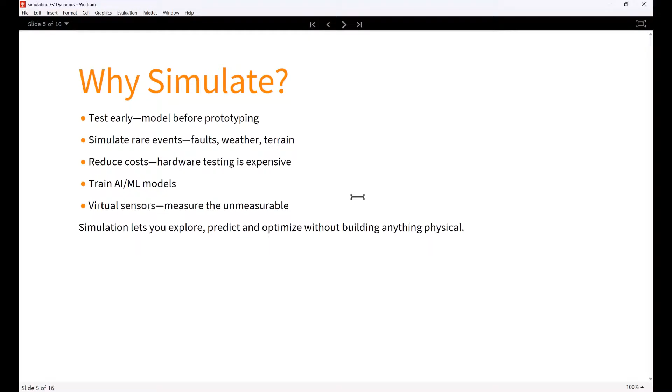With that in mind, let's jump into our EV model and look at the simulation results. Let's open up the model in System Modeler.

For those of you who are new to it, this is the System Modeler's modeling interface. You can build models visually using drag and drop from the built-in Modelica library. This library includes hundreds of components from domains like electrical, mechanical, and thermal systems. Throughout this presentation, we will look at several of these components more closely and see how they connect to simulate electric vehicle behavior.

Here you can see the top level EV model. The EV is connected to a velocity profile representing how the vehicle moves, and to an ambient component with a temperature input. These components are hierarchically structured, meaning each block contains subcomponents, which you can explore by double-clicking.

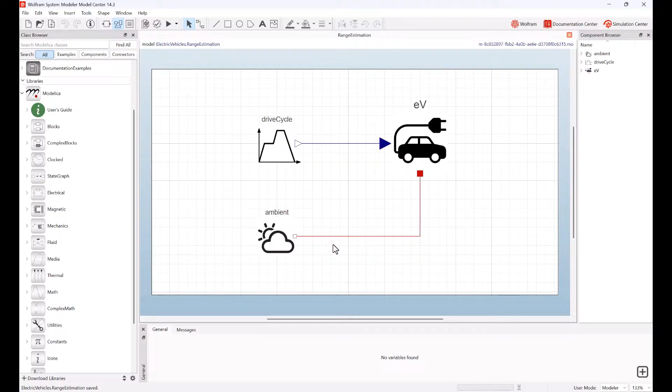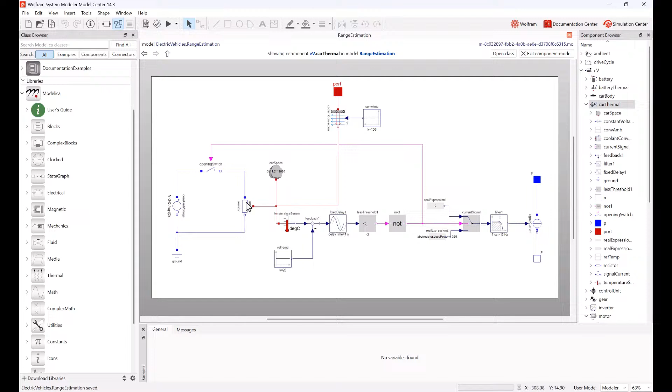Let's zoom in one of the EV block. Inside, we see a detailed view of the EV architecture: motor, gearbox, controller, inverter, battery, and thermal systems. You can continue drilling down into any component and even switch to text view to inspect or modify the underlying equations.

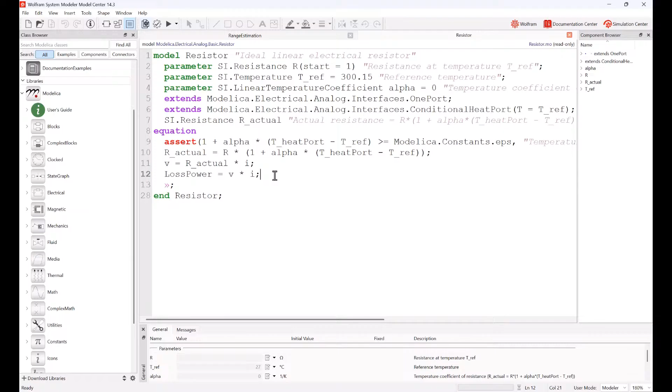For example, in a resistor block, you will see Ohm's law implemented explicitly with voltage and current relationships. You are not limited to built-in components either. You can define your own custom models from first principles or experimental data.

Let's return to the top level and now explore each of the major components one by one. Let's now walk through the major components of the EV model. We start with a battery, which acts as the energy source.

In our case, it provides a DC voltage of around 350 volts. That DC voltage needs to be converted into AC before it can power the AC motor. This is done by the inverter, which sits between the battery and the motor.

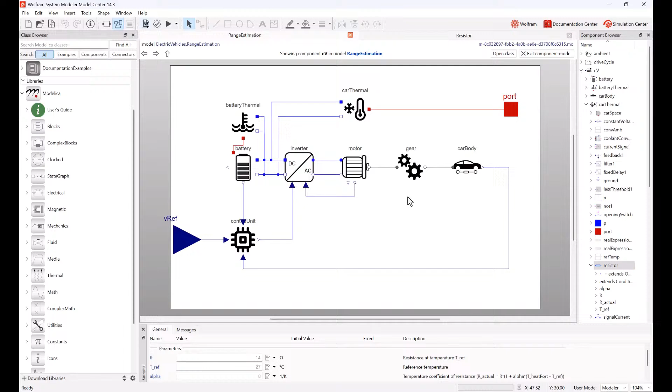The motor produces torque, but at a very high rotational speed, often around 20,000 rpm. To match the wheel speed, this needs to be reduced, typically down to about 2000 rpm, and this is done using a fixed gear reduction stage.

From there, power flows into the car body model. This component accounts for all the external forces acting on the vehicle, including aerodynamic drag, rolling resistance, gradient forces.

There is also a control unit which monitors vehicle speed and regulates current supplied to the motor to achieve the desired driving profile.

Finally, we include thermal components, one for the battery and one for the car, to simulate how heat builds up or is dissipated during operation. Of course, in a full vehicle model, there are many other components such as DC-DC converters, auxiliary batteries, and accessory systems. But for this presentation, we will focus on the core powertrain and thermal systems.

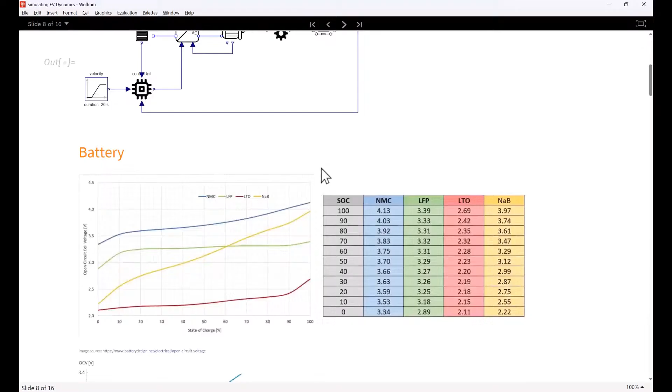Let's take a closer look at the battery component, which plays a central role in EV performance. There are different types of battery chemistries used today, such as LFP, NMC, and LTO. Each chemistry has its own characteristics, and one of the most important is the open circuit voltage versus state of charge, or SOC, curve. In the chart shown here, you can see how the voltage changes as the battery discharges.

NMC cells deliver the highest voltage, around 4 volts at full charge. LTO cells deliver lower voltage, around 2.5 volts. LFP, though not the highest in voltage, has a nearly flat OCV curve, which means the open circuit voltage stays stable across a wide SOC range. This ability is one reason why LFP has become widely adopted in many EV platforms.

Now, this data is for a single cell. In a real battery pack, however, cells are arranged in series and parallel to reach the desired voltage and current capacities.

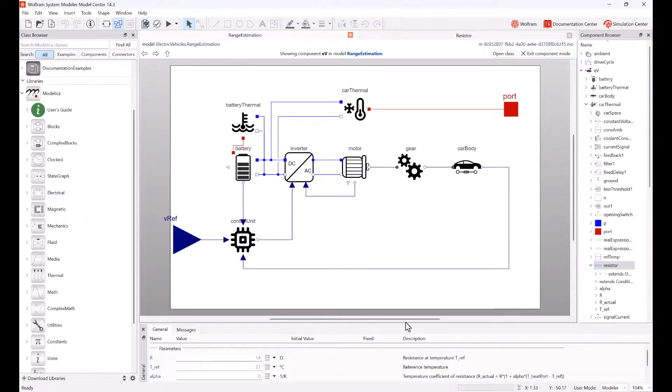Let's get back to System Modeler. In our battery model, we can define these parameters: number of cells in series to get the total voltage, and number of cells in parallel to get the total current capability. For the cells, we can also provide the internal resistance, nominal charge, and define the OCV curve itself.

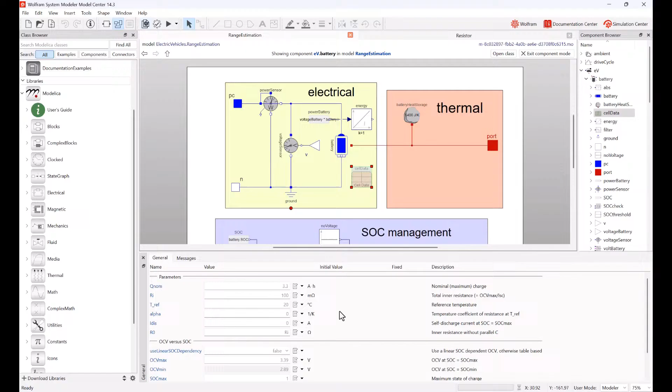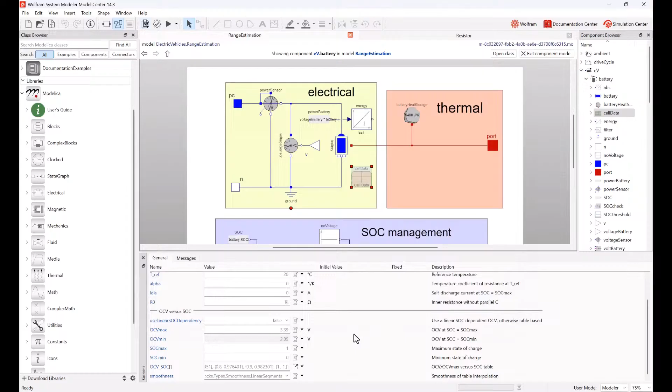The model also includes the electrical dynamics of the cell. Internally, each cell is modeled with a primary series resistance and one or more RC circuits to represent the transient behaviors like hysteresis.

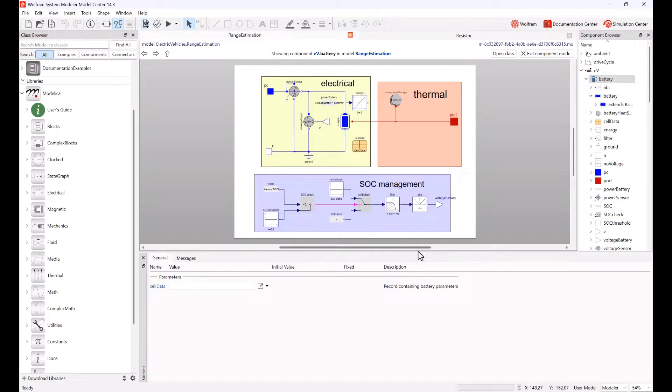There is also a heat port built into the battery model. This port gathers all the thermal losses caused by the internal resistances. The heat is passed on to a thermal capacitor, which is a lumped model representing thermal mass. Its capacity is calculated using the formula mass times specific heat capacity.

This thermal capacitor can be connected to a cooling or heating circuit, for example a refrigerant loop, to simulate active thermal management.

Lastly, a note on connections in System Modeler. You will see red and blue lines connecting components. These aren't just input and output signal wires. They represent energy carrying domains like electrical and thermal connections. This approach ensures that conservation laws like energy and mass balance are automatically enforced, and that connections stay consistent within the physical domains. You cannot directly connect an electrical wire to a thermal capacitor.

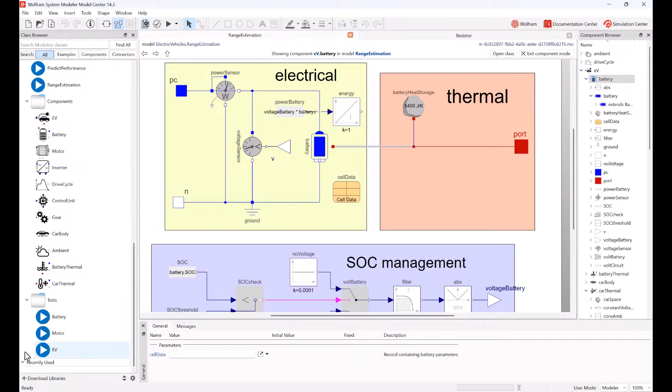Let's now simulate a simple battery test scenario. In this model, we draw a constant current of 100 amperes from the battery pack, which is a typical discharge profile for a sustained load.

As expected, you can see the voltage output starting at around 370 volts and gradually decreasing over time. This follows the OCV versus SOC curve we discussed earlier. As the state of charge drops, so does the voltage.

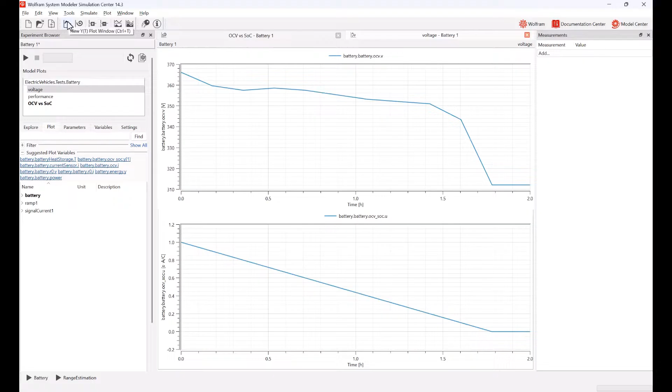Of course, in a real system, thermal management would prevent this. But this test shows why modeling thermal behavior is essential and why cooling systems are not optional in high power applications like EVs. Without proper heat extraction, the battery can quickly enter unsafe operating conditions, affecting not just efficiency but also safety and lifespan.

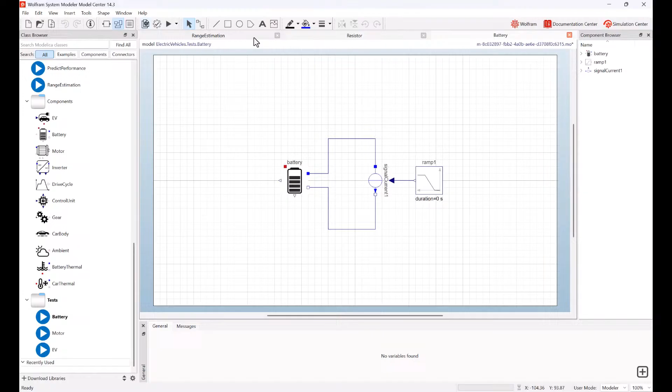Electric vehicles can use a variety of motor types, but the most commonly used in modern designs is a three-phase AC permanent magnet synchronous motor, or PMSM. These motors are popular due to their high efficiency, power density, and good performance over a wide speed range.

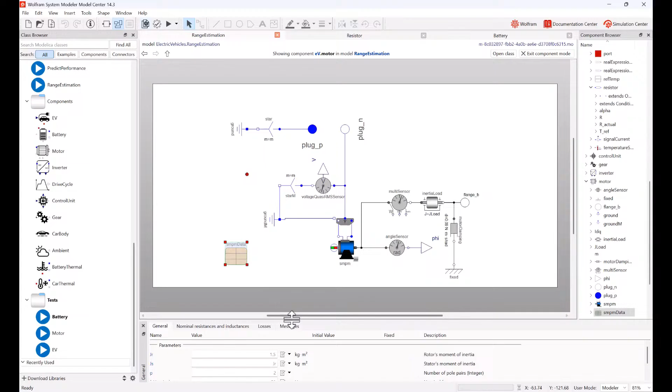In our model, I have used the three-phase permanent magnet synchronous machine component from the Modelica library. This component is based on physical equations and allows you to specify key parameters such as stator resistances and inductances, permanent magnet flux linkages, torque constants, and mechanical losses.

One useful feature of this model is that it is bidirectional. It can operate both as a motor and a generator depending on the power flow direction. That is essential for simulating regenerative braking scenarios, where the motor recovers energy and sends it back to the battery.

On the mechanical side, the motor is connected to a shaft model which includes a rotational inertia to simulate the mass of the rotating components, and a damping element to represent friction at the shaft or bearing level.

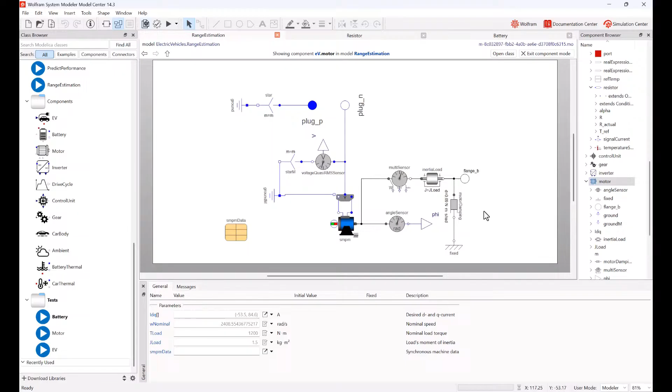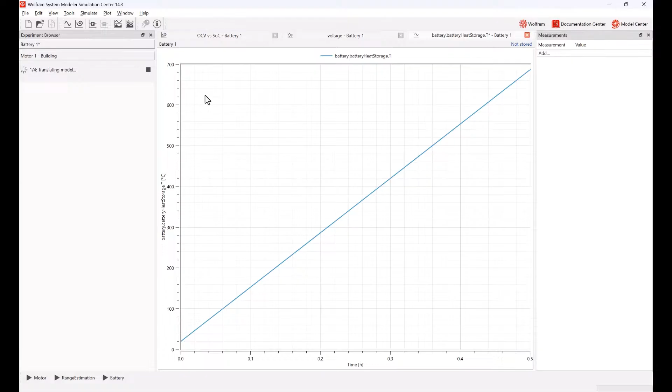Now let's simulate a simple driving scenario. The vehicle accelerates from 20 to 100 km per hour.

Now let's take a look at the car body component, which brings together the mechanical forces acting on the vehicle. This component accounts for four main forces: traction force, generated at the wheels by the motor via the drivetrain; gravitational force, due to the weight of the vehicle when it moves along a slope or gradient; rolling resistance, caused by the friction between the tires and the road surface; and aerodynamic drag, the resistance from air which increases with speed.

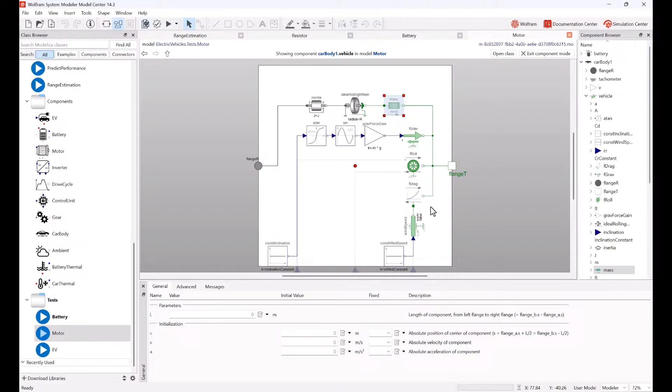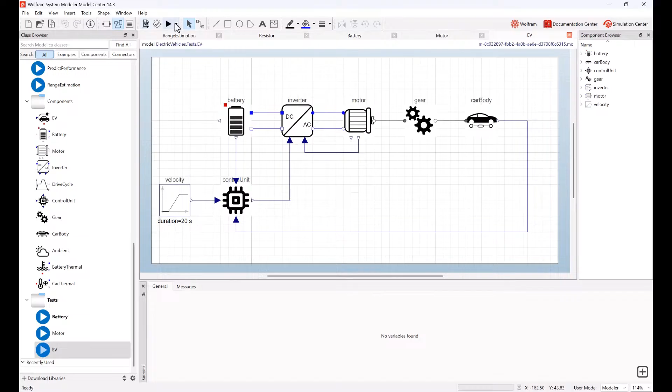In our test simulation, the vehicle moves over a constant incline while accelerating from 0 to 100 km per hour. Let's simulate and see the results. The rolling resistance and gradient force remain constant since they depend on vehicle weight and slope.

However, aerodynamic drag increases quadratically with velocity, meaning it becomes a dominant factor at higher speeds. To move the vehicle, the traction force generated by the motor must overcome all of these resistance forces. In addition, it must supply extra force for acceleration, especially in the early phase of motion. This component gives us insight into how external forces interact with the drivetrain and how energy demand changes as the vehicle moves.

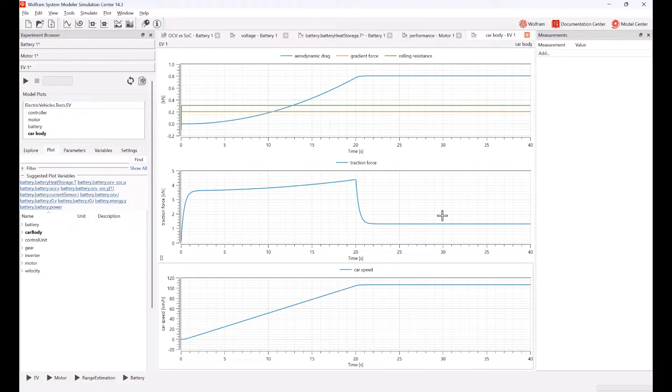So far, we have seen how I modeled the key components of the electric vehicle, from the battery and motor to the car body. One of the strengths of this approach is flexibility. Depending on your modeling objective, you can increase or reduce the level of fidelity. For example, you can use a detailed electrochemical battery model or simpler data-driven interpolation curves. For our test case, the current level of fidelity gives us the right balance between accuracy and simulation speed.

Now let's return to the original question: how far can this vehicle drive on a single charge, and how do external conditions affect that range? To keep things simple, we will assume the car drives at a constant speed of 110 km per hour on a flat road. Under standard conditions, the vehicle travels about 400 km on a full charge.

If there is a headwind of 20 km per hour, the range drops to around 360 km. But if the outside temperature falls to minus 10 degrees centigrade, the range drops further to just 300 kilometers. That's a 25% reduction in range from 400 to 300 km caused by cold weather.

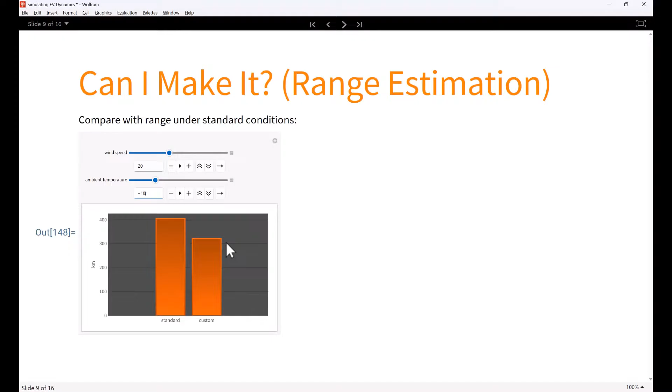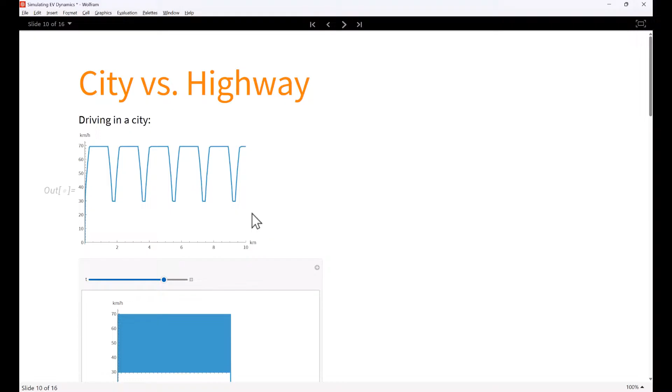The next question we asked was, how does city driving compare to highway driving in terms of range? In city driving, we typically deal with traffic, lower speed limits, and frequent stop and go movement, resulting in regular acceleration and braking. For this simulation, we used a driving cycle where the vehicle speed fluctuates between 30 and 70 km per hour, mimicking typical urban traffic. We run the simulation until the battery reaches a minimum SOC threshold of 20% to simulate practical usage.

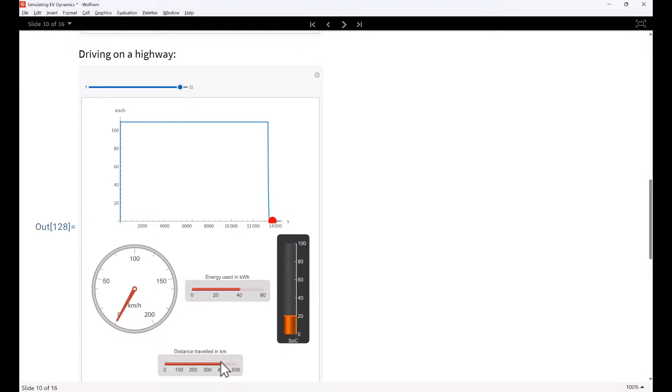Surprisingly, the vehicle travels up to 500 km in this city scenario, significantly more than the 400 km under highway conditions. So, what contributes to this increased range?

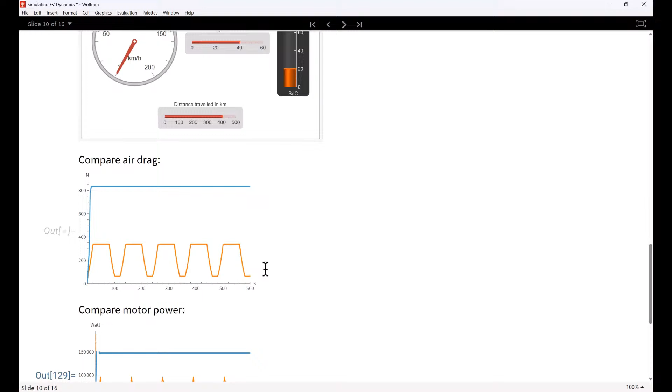First, aerodynamic drag is much lower at city speeds. It drops from around 800 newtons on the highway to about 400 newtons in city driving. Since drag increases with the square of speed, this has a major impact on energy consumption.

Second, the motor acts as a generator during braking, recovering energy. In our simulation, it generates peaks of around 8 kilowatts during regenerative braking events.

And third, battery cooling demand is lower in city driving. At high speeds, the battery generates more heat and needs active cooling. At lower speeds, thermal losses are reduced, meaning less energy is spent on keeping the battery within safe operating temperature. Together, these effects combine to make city driving more energy efficient, even though it may seem counterintuitive.

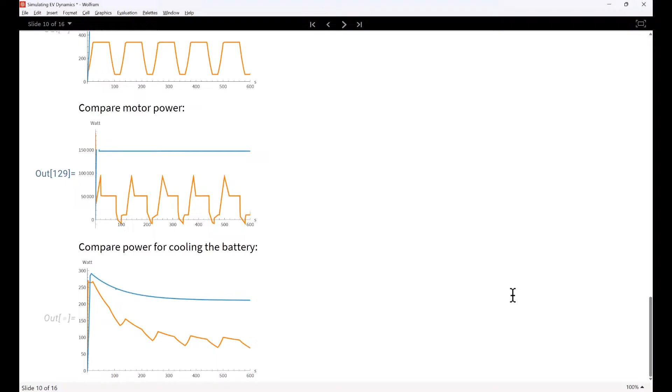Now, let's look at the impact of terrain on energy consumption and range. Let's say you're driving uphill on a road with a constant slope of 7 degrees, a typical mountain ascent.

In our simulation, after driving for 2 hours, the vehicle ends up with around 40% state of charge, compared to about 60% state of charge if it were driving the same speed on flat terrain. That 20% difference highlights the additional energy required to overcome gravitational resistance when climbing.

However, there is an important consideration here, something that's easy to miss in range estimates. If you're driving back downhill, the situation reverses. The motor can act as a generator, recovering some of the energy that was spent climbing. This is an example of regenerative braking, where potential energy from elevation is converted back into electrical energy and sent to the battery, rather than being lost as heat.

So, while uphill driving reduces range, terrain isn't always a one way loss. In looped routes or round trips, net elevation change matters more than the presence of hills alone.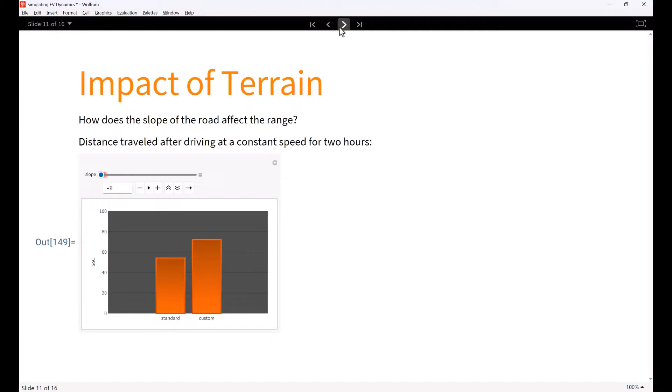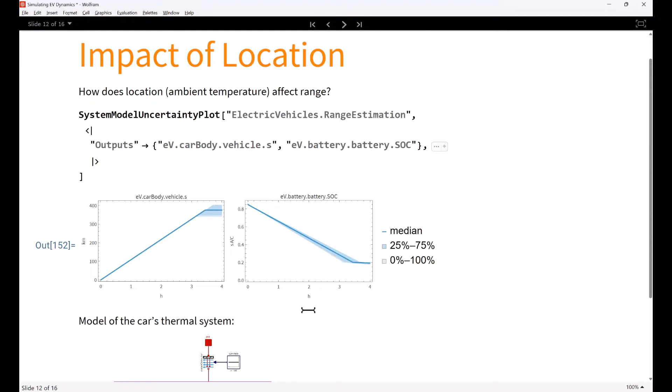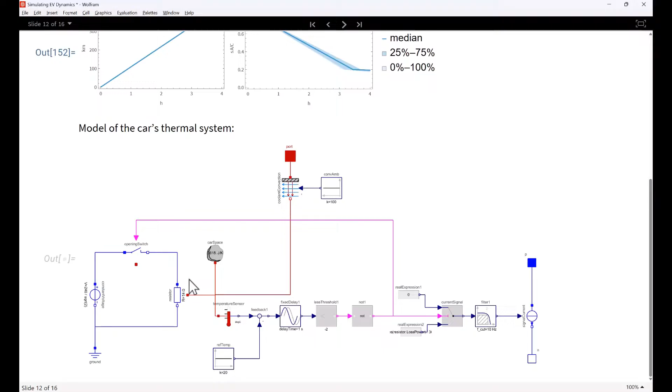The main contributor to this drop isn't just battery chemistry, it's space heating. In cold weather, energy is diverted from the battery to heat the cabin. In our model, we use an electric resistance heater which turns on when the cabin temperature drops below a set comfort level. This adds a continuous energy load during winter driving. So, it's not just cold batteries, it's also the need to keep passengers warm that reduces range in cold climates.

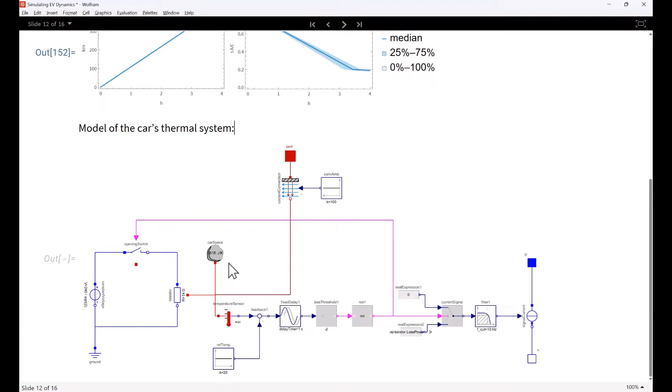In modern EVs, space heating is often handled more efficiently using heat pumps instead of simple resistive heaters. Heat pumps work by transferring heat from other parts of the system, including the drivetrain or ambient air, and can be significantly more energy efficient.

One interesting opportunity, especially in colder climates, is to reuse the heat generated by the battery itself. In System Modeler, this is easy to explore. You can tap into the battery's heat port and redirect that thermal energy to the cabin space using a thermal connection.

Or you can go a step further and model a full fluid coupled heat pump circuit. I will leave that as an open exercise. Try building this in System Modeler and see how much range you could save by reusing the waste heat.

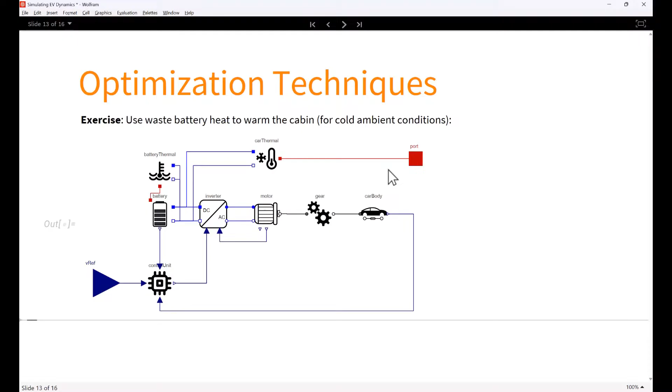And finally, to summarize: simulate before you build. It helps identify design issues early before committing to hardware. Terrain, temperature, and traffic conditions all have a significant impact on range and performance. And finally, virtual models let us measure what's otherwise unmeasurable, from internal thermal losses to hidden energy flows.

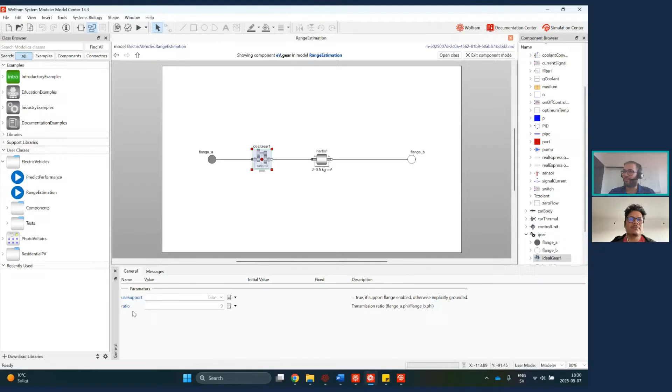So this component could be changed for some kind of automatic shifting gear, right? Yes, yes, yes. Basically, what we have here is we have the ratio defined as a parameter, and if you want to change things while simulating, you might want to change it as a real input and then play with the input if you want to change it on the fly. All right, that would be like a way of making a simplified model of a gearbox.

But yes, I have seen also some Modelica models or System Modeler models, probably you don't have them here, where they try to model a full automatic gearbox. So I guess it should be possible to plug it in if you wanted to have a more complex model of the gears. But I guess in this case it's good enough. For EVs, you don't need that complex gears because the torque the motor provides is almost constant, and it's highly efficient for a wide speed range. So you don't need to vary the gears that much. But yeah, of course, you can have a complete logic behind this, and then you can model that.

Okay Leo, in the meanwhile, if you can show the results for the first poll. So, which is not a key component of an electric vehicle powertrain? Inverters, of course, is a key component of the EVs.

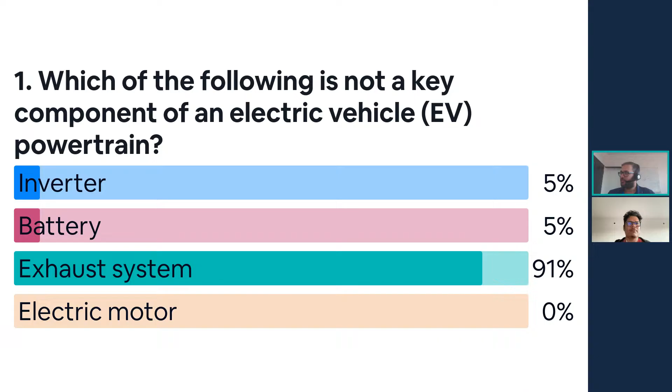Okay, so Rob, a second poll please. In which driving conditions do EVs generally deliver better range? Yes, it's city driving, and the reason is primarily because of the regenerative braking. So, yes, the first one is the right answer.

And then, Rob, if you can show the third poll. Yes, which type of motor is most commonly used in modern electric vehicles? It is permanent magnet synchronous motor, but I think when it started, it was induction motor, and currently it's primarily permanent magnet synchronous motor that's being used.

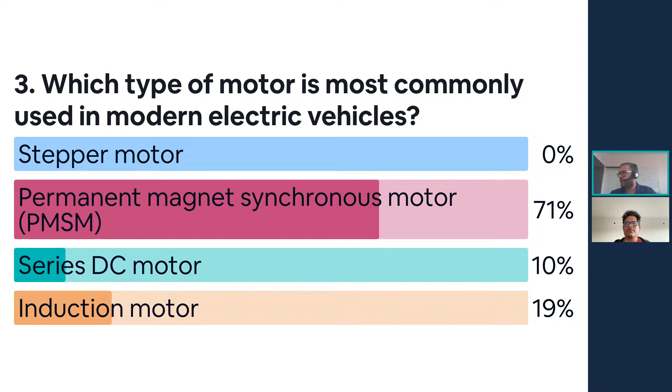Yes. Okay Leo, do you have any other questions for me? Yes. Well, in this case, more than a question, it was just like a comment.

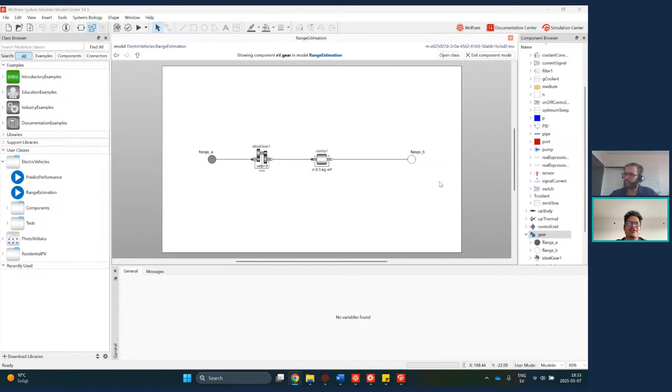I don't know if you're aware that there are communities of people doing DIY, creating their own electric cars. So you don't need to buy them from any company. What they do is they create or manufacture their own battery packs, replace the motor with batteries and the electrical parts. So this kind of modeling will be very useful for that community because it allows them to calculate how much battery they need to carry.

Yes. And one very much related field where we have helped some of our customers is in drone modeling as well, because in drones the voltage profile from the battery is also very important.

If the voltage changes, then the force generated by the propeller changes as well. It's also very much similar—of course, it does not have this AC motor in it. It has this brushless DC motor, but there as well, the concept is similar.

Yeah, I was thinking, I don't know if you had it in this model, but it's surely possible or very easy to do. For example, if you want to add more cells to your battery, how much weight is that going to add to your car, and also you should be able of calculating the range for it.

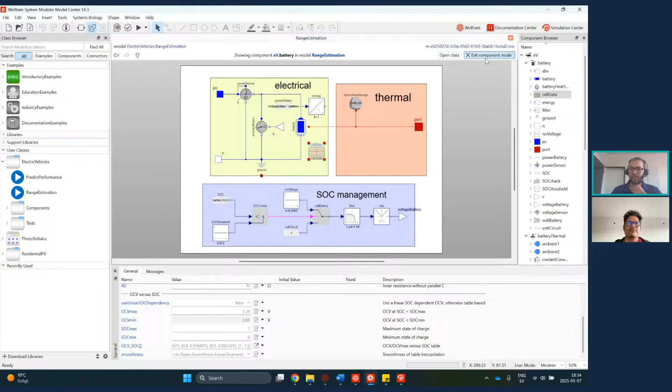Right, so in the battery model, one thing that we do not have by default is the weight of the battery. The way I have defined it is, if I go into the car body, we have this vehicle component, and there we have the dead weight of the car, which I think takes into account the battery weight as well. But if you want to test—say I have 5 passengers, if I want more luggage—then you can manipulate this mass parameter and check how it would affect things.

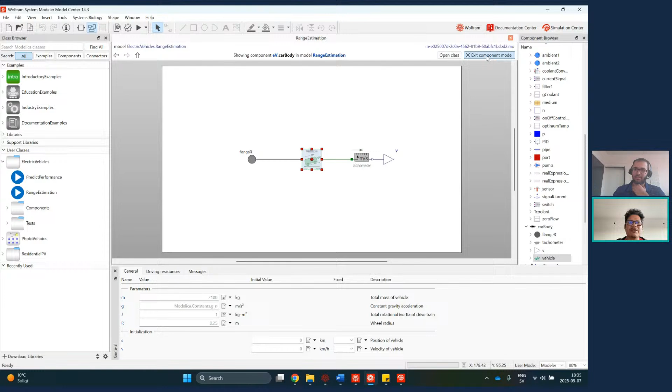So now that you mentioned the battery model, did you also consider the thermal management? Oh yeah, yeah, that is something I did not cover yet. So in the battery model, of course, in a real EV you have a very complicated circuit.

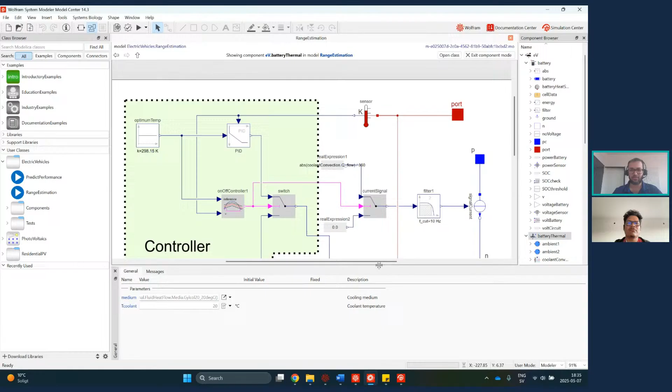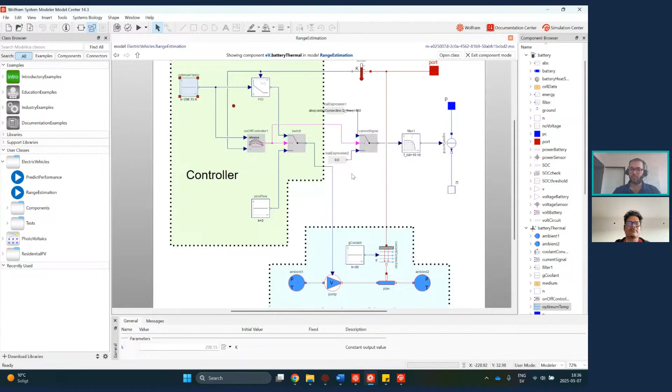In my case, just to represent the scenario, let me show. I take the heat input, I convert it into a real signal, because the heat port that I have, I cannot directly use it with my controller circuit. Here I have a simple PID controller which tries to set the battery temperature at 25 degrees centigrade. From there, I have a very minimal cooling circuit, basically a fluid at a constant temperature going from left to right. What this PID does is it manipulates the mass flow rate of the fluid passing through the pump, so that it can absorb all the heat.

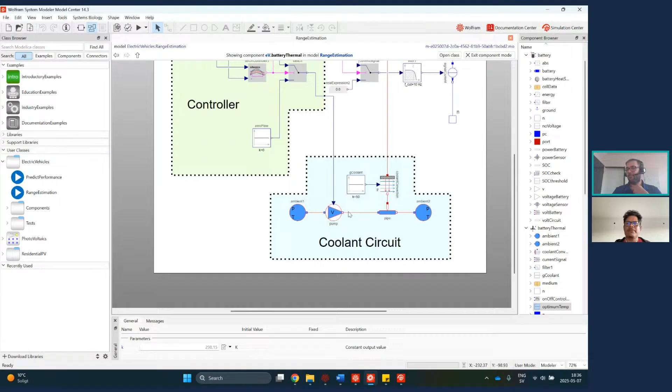But in a real circuit, you will have a more detailed coolant circuit with pumps, valves, and a different configuration. For this scenario, I just showed that it's possible to combine the control logic to a coolant circuit.

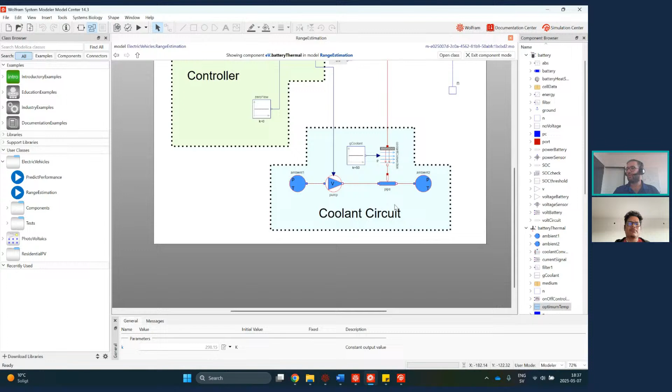So this is like the radiator of gasoline cars—a place where the liquid is being cooled, right? And then it flows into the battery, and there is a change of heat, right? Yes, yes, yes.

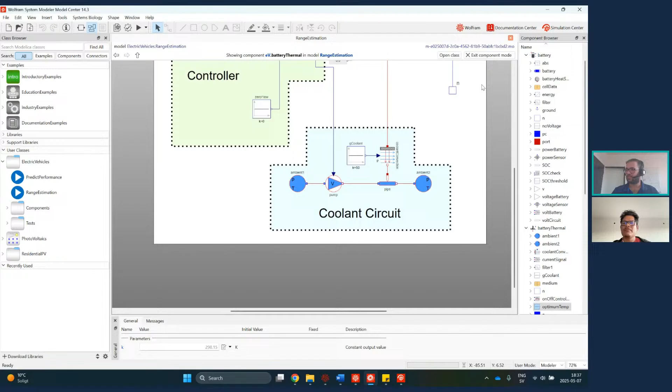Let's take some questions, Leo. One question was, how do we get access to the models that I showed here? If you have the same version of System Modeler and Mathematica, version 14.3, then it should work automatically.

So if you have Mathematica 14.3 and if you run the initialization command, the model should automatically load in System Modeler 14.3—you don't need to do anything. But if you have a different version of System Modeler and Mathematica, you would need the model file. Robs, after this, maybe I can send you the model, and you can send it via mail to all the participants later on.

Thank you. So the next question is from John: can you give a quick brief overview of the key vehicle parameters?

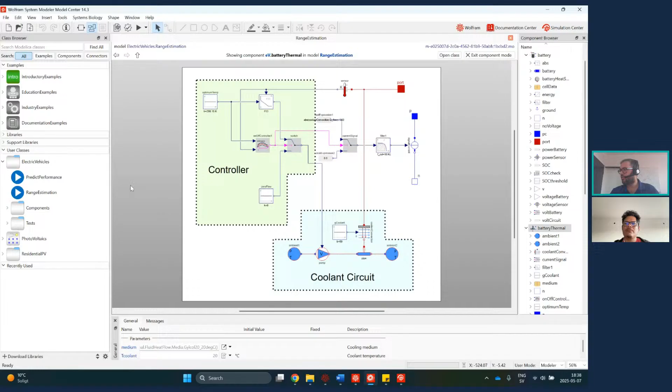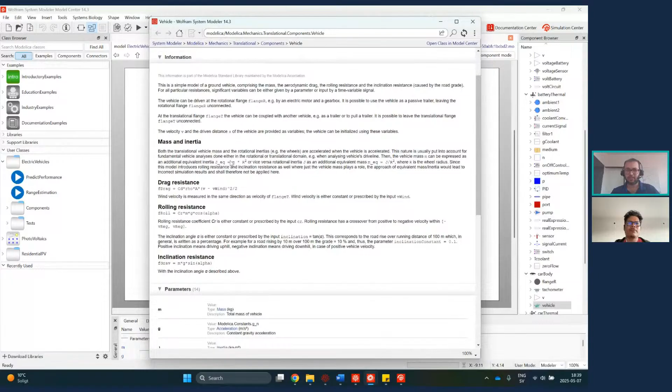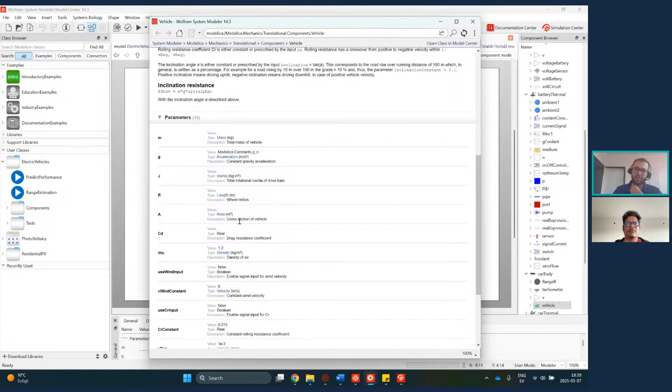Right, so in my car body, the vehicle component that I have used—if I open the documentation for it, right click and open the documentation—here you could see how the vehicle model is modeled, like how the different resistances are calculated, and the different parameters you can set: the total mass of the vehicle, the wheel radius, the frontal cross sectional area to compute the air drag, the rolling resistance coefficient, and other things.

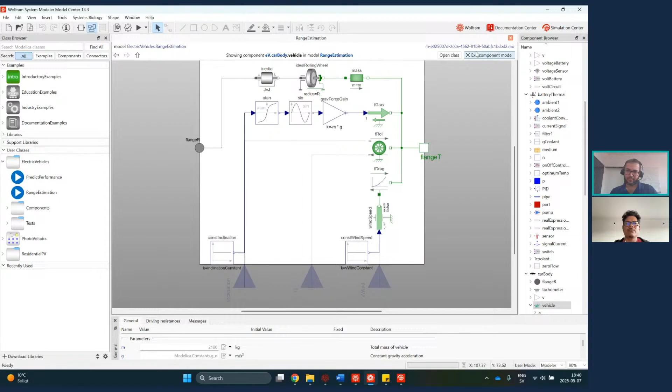Right, Leo. Are there any other questions, Leo, that you had?

No, I was just wondering, let's say that I want to install some solar cells on the roof of my house. I guess it should be possible, or simple, to do the calculations and simulation to see how much energy I will need to charge the battery.

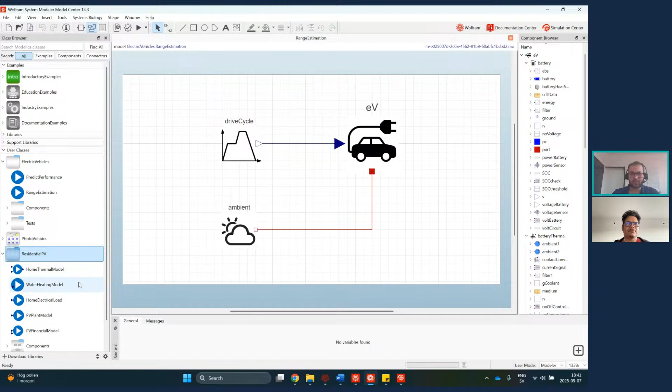Yes. So during the Wolfram Technology Conference, and this presentation is also on YouTube, there's a third party library called the Photovoltaics Library that has the solar cell components. Let me bring it up. I also wrote an article about it.

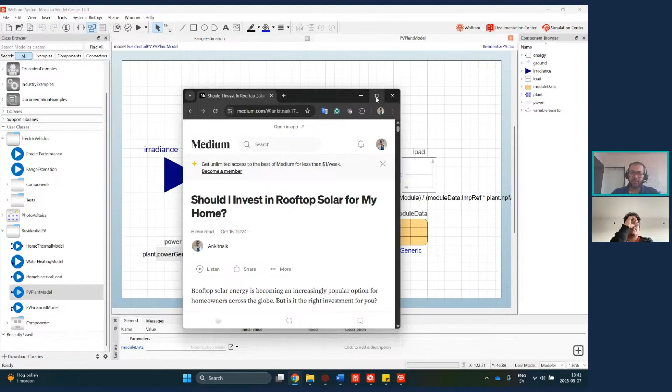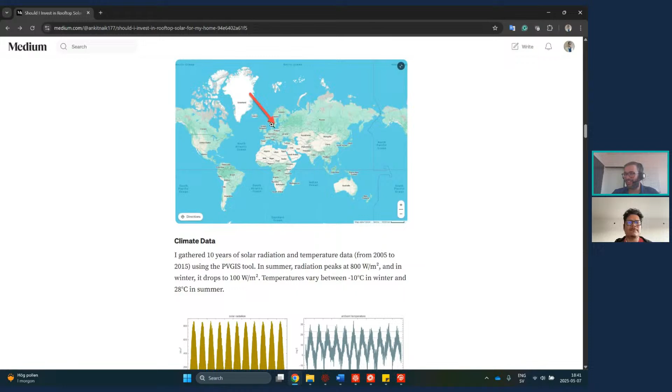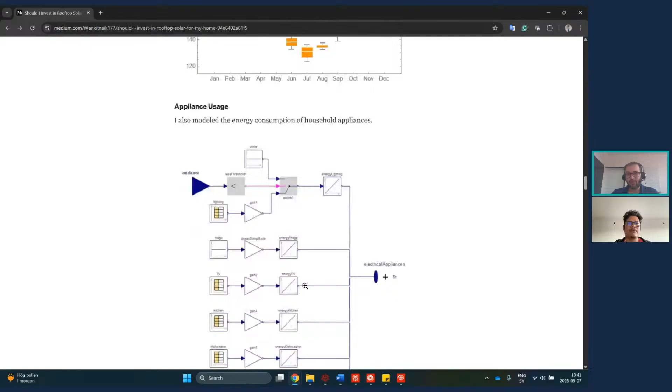We showcase, for a given location, like we are located in Linköping in Sweden, what is the solar profile that we have here. And based on that, we compute the energy consumption throughout the year.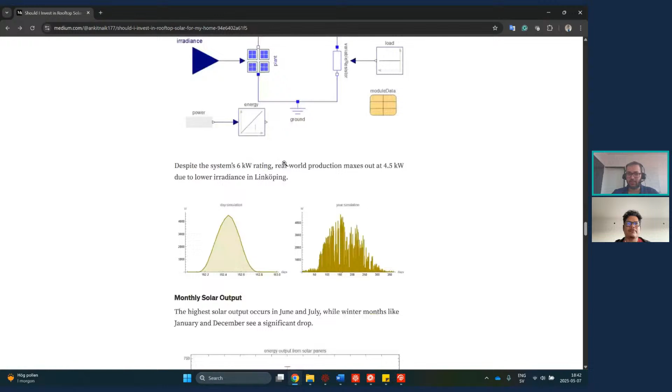In this presentation, I also showed how to calculate the power you can obtain from a solar panel for a 50 square meter house. Here you could see the yearly simulation, and here was the monthly energy output that we get from the solar panels. From here you could use this presentation to see if it is favorable, and in which months you could use your solar power to power your EV and such.

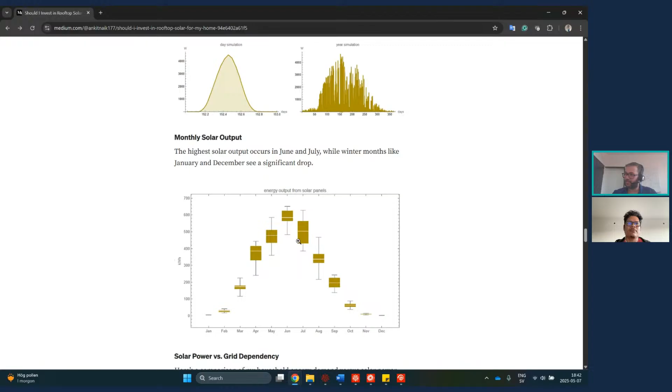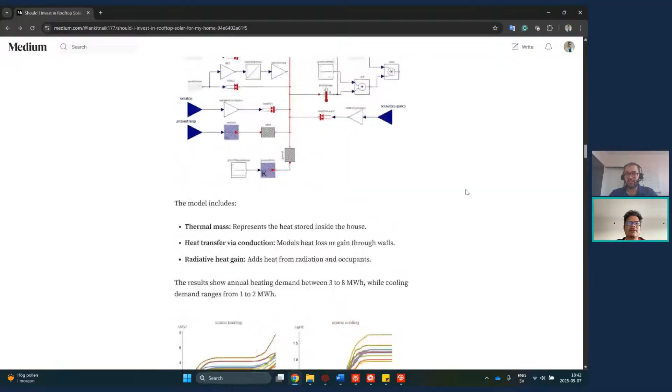So one question is, in this case, you use real data, right? Yes, in this case there's something called PV GIS, a third party database. From there I obtained the solar radiation and ambient temperature data, and then I got the power from my solar plant. But yeah, this is a side topic from what we are discussing today.

But yes, you could model this, and if you're interested, search for rooftop solar with System Modeler, you can find it on YouTube as well, on our Wolfram R&D channel. So it's hosted there.

And just one more, going back to the thermal management - I guess it should be possible as well to combine this model, or to obtain the data to be used, for example, in finite element simulations, for example for the radiator. Yes, so what are the applications?

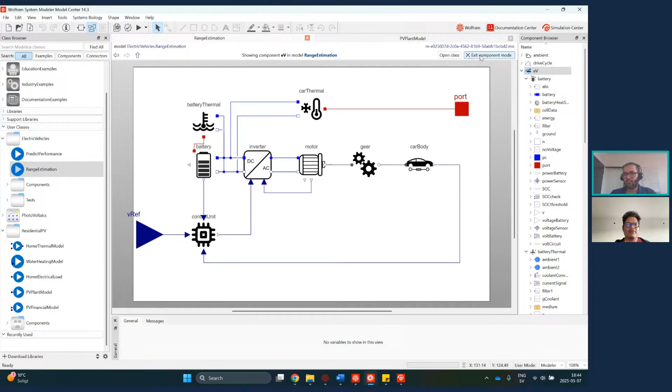Like, okay, one thing is fine - you are trying to design a new drone or new EV, and you want to size the different components. You have the specifications from different suppliers, and based on those specifications, you want to see how the final output would be. That is one use case.

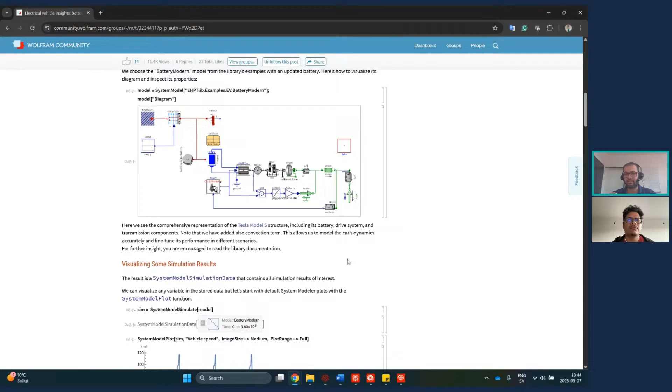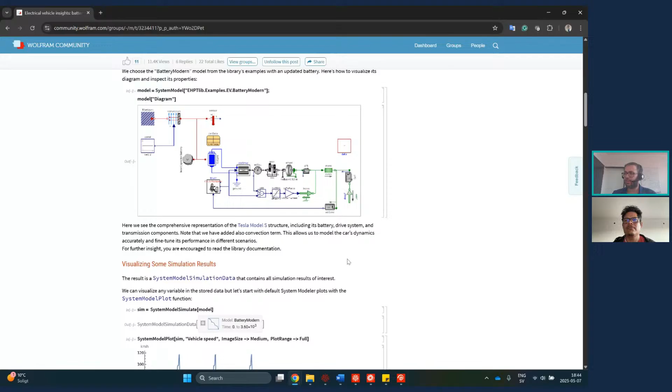The other use case, as my colleague Vedat had also shown before, is you can use these models to get boundary conditions. So if you have a FEM model of a battery pack, and you want to input the inlet current that needs to be fed into your battery pack, or the inlet coolant that needs to be fed to the battery pack, and how the temperature profile across the battery pack would behave spatially.

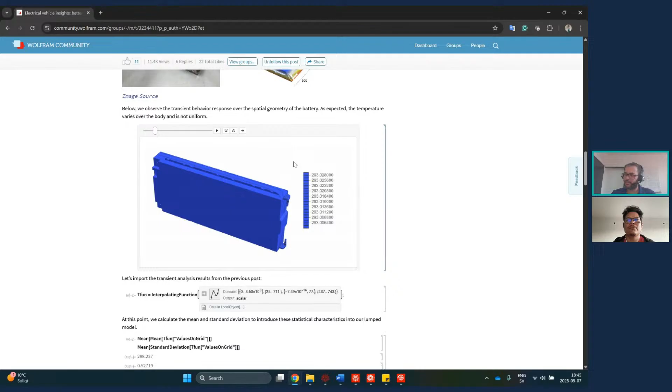So you need a FEM model, and in that case you can use the system model to generate those boundary conditions, and feed those inputs to your FEM model, and then you could see spatially how the heat is distributed across the 3D space. So yeah, once you have the model, you can do all those sorts of interesting things.

Right, right. And another question that I see here is regarding whether the files are compatible with version 14.2, because I guess you have 14.3.

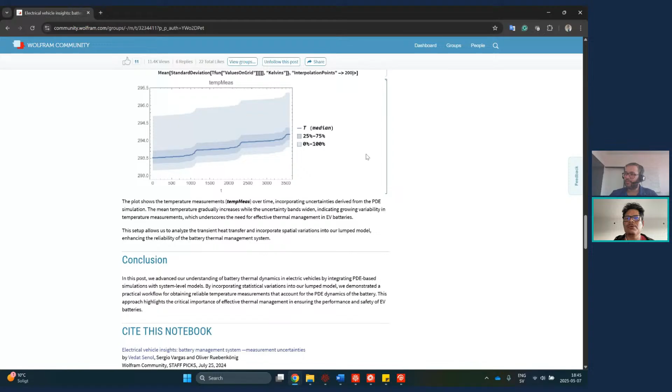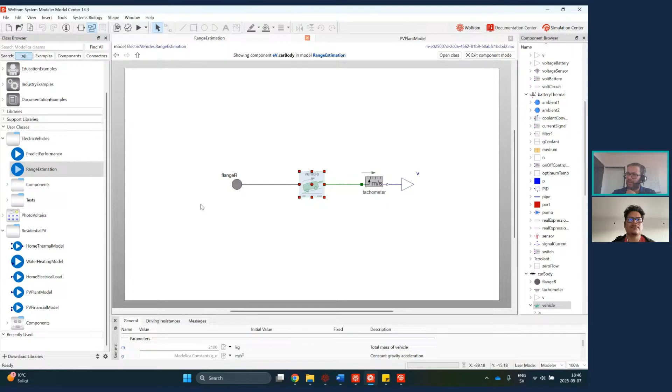Then the question is, if I have Mathematica 14.1, does it have the System Modeler? I think since version 12, Mathematica comes with the System Modeler kernel, so you should be able to run the models in the notebook. But as we were discussing with Leo, some older versions of Mathematica and System Modeler might not have the updated Modelica library in it, so some of the components I'm using might be missing. But one thing that should also be possible, Leo, is that if you upload the presentation notebook to the Wolfram Cloud, you should be able to evaluate it there. It should work there because it uses the recent version. I'm not sure about the dynamics, but I think it should work there if you want to play around with the manipulates.

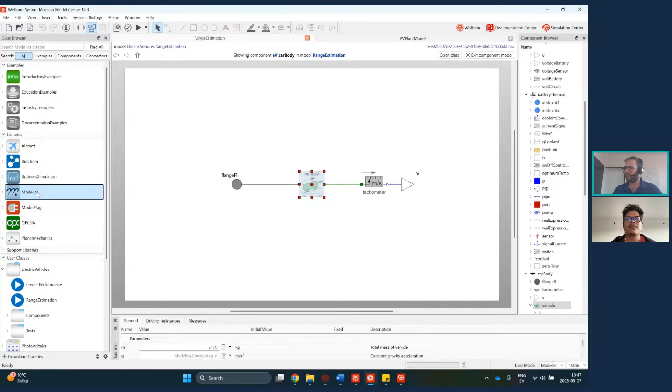Right. Um, yes. Okay, Leo.

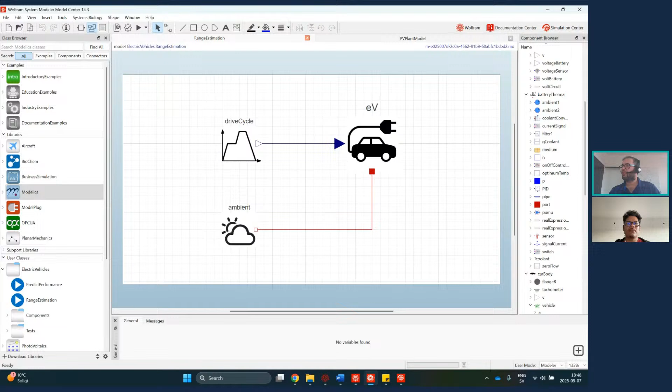Before, one thing I also wanted to highlight was we have this upcoming study group on electric vehicle dynamics. So today what we had was a very brief overview, very general, so that everyone can understand and get a feel of it. But we have a study group on this EV modeling part where we go into more details, digging deeper into different subparts like the battery modeling. We devote an entire hour to battery modeling, and Leo will help me with the power electronics part, like how the switching system in the inverters and DC-DC converters work. We'll go into detail there, and hopefully you'll be able to model that as well. We'll also look into different motors, like the brushless DC motor and the permanent magnet synchronous machine, and see in detail how those work. Finally, we'll have a small thermal management session, combining a thermal loop with a fluid loop and trying to see how you can transfer heat from one location to another. And if time permits, we'll use a heat pump and show how a heat pump works. So if you want to dig deeper into the different components we covered today, you are more than welcome to join this study group, starting from June 23rd onwards.